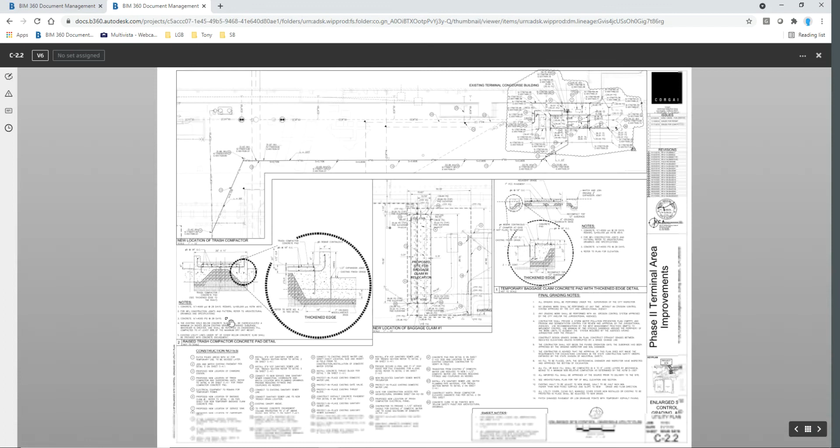So project drawings, early work. So this latest one. Okay, so you go in, you find the sheet. So let's say it's this sheet that you want. That's the right sheet. You have a few options. You can click here and you can export. And then it asks you, do you want to export with all the markups, which are all the RFIs and the hyperlinks? Usually I'd say no. Press continue.

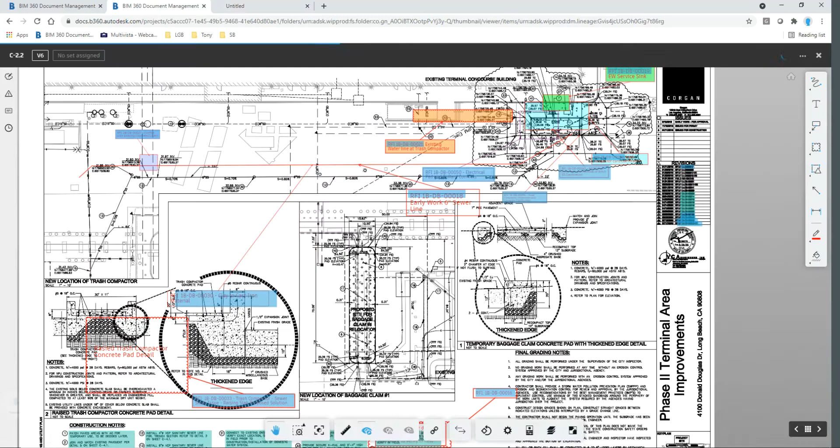This thing will pop up. It says, hey, this is a sheet. Where do you want to save it? I'll save it on my desktop for now. Boom. So now we have that one. We have the other file. So now what we're going to do is let's clean this file up first. So we're going to open up the DCN.

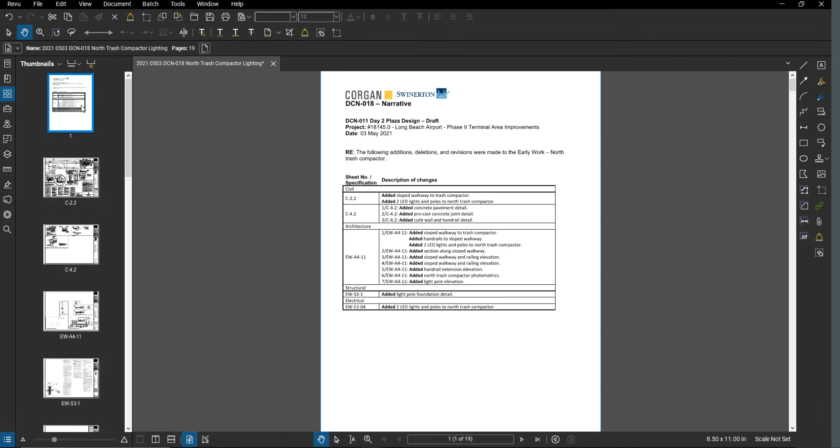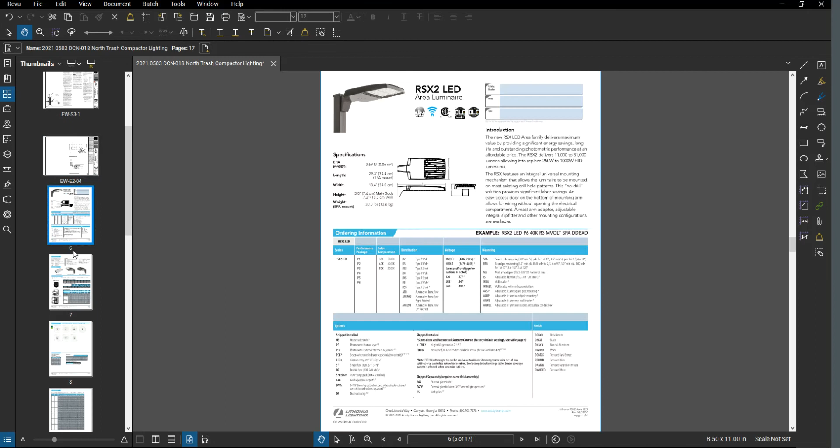I usually just start by deleting all the pages that we don't need. So I'll delete the cover sheet. We'll keep this one. I don't think we need either. This one we'll keep. We'll keep that one. This is the electrical sheet. Okay, so we're going to do one RFI right now just for the location of the light pole relocation. So right now, really, all we're going to show them is this light pole relocating. So we probably don't need the elevations.

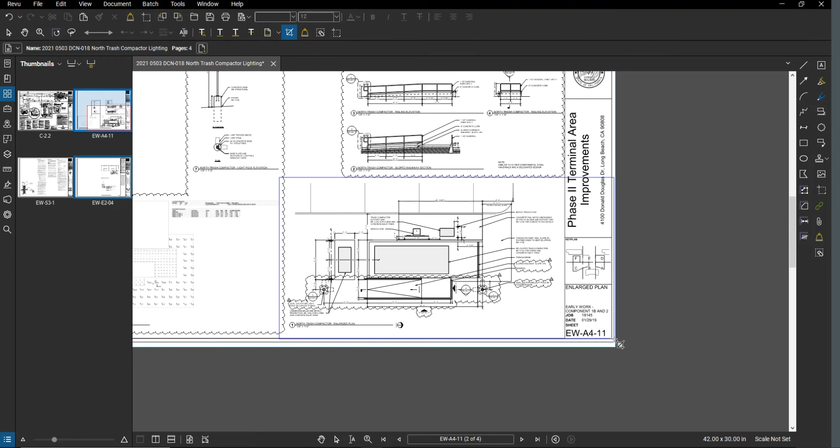So usually what I like to do is I'll crop the sheet with just the information that I need. So in this case, I'll grab the crop tool here and crop this. I'll include the page number. That way the page number is in there. Boom. So now you have just the plan view that you need, the sheet number. We're going to do the same thing with the civil. So this one's a little tricky because the sheet that we want is here for the information, but the page number is down here.

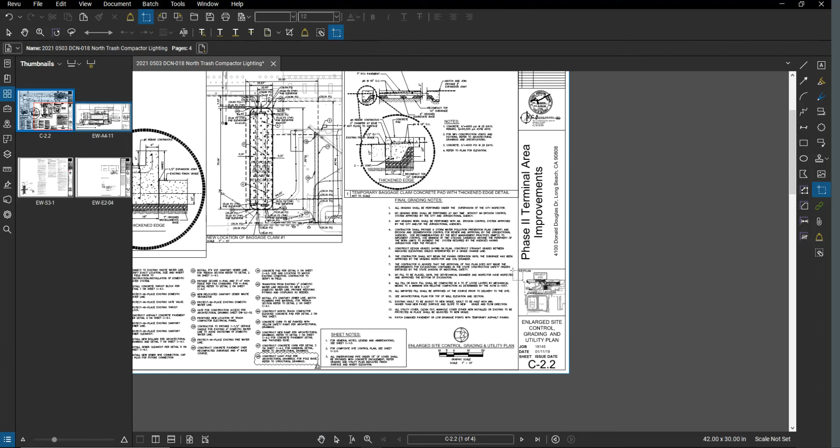So what I do is I do the snapshot. I do a snapshot around just the page number. Wait for it to load. Right click, paste. So now you have it. It looks weird. It's usually this fill color. Change it to white. Now it's solid. So I'll put it somewhere in here. I can make it smaller. Actually, let's find a corner for it. And then I'll do the same thing. I'll crop just the information that we need. So crop it to here.

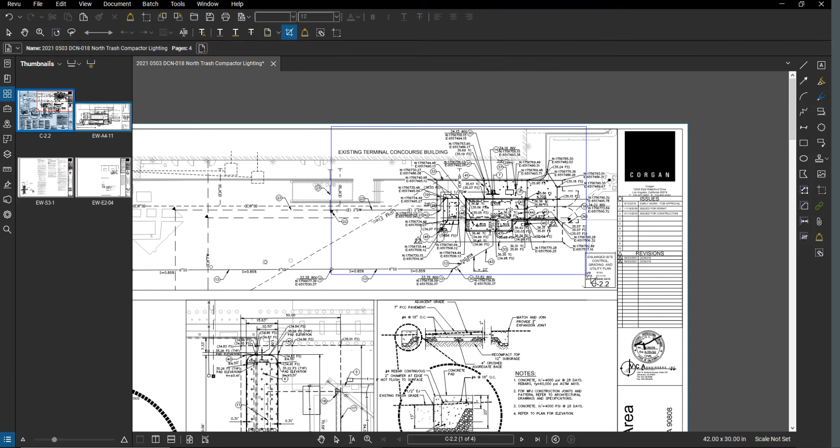All right, so now if you were to print this out on 8.5 by 11 or whatever, it'll come out fine. So you can actually see it. So now we have these two cropped sheets. We don't need this one. We don't need the electrical. Okay, so I'm gonna save this. So now we have this DCN with just the sheets already cropped. I'll select all the sheets that I need. Right click, combine. Once it combines, I'll do RFI and then press OK. It's going to create a new file.

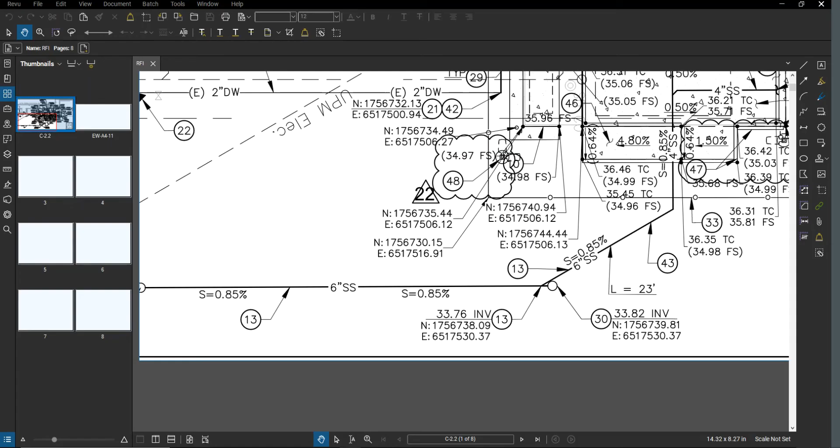All right, so we just combined all the pictures, all the plan views. So we already have our cropped sheet with the page. We got the next one. These pictures we took, but we're not going to need. That's a separate RFI, so we're going to delete these for now. And we're going to keep this one here. And really the issue is that light pole is in the way of this trench, which has a sewer line in it right now. So the first thing we'll do, I usually like marking it up. I'll use this polyline and maybe highlight where the trench is. It's roughly here. It goes here.

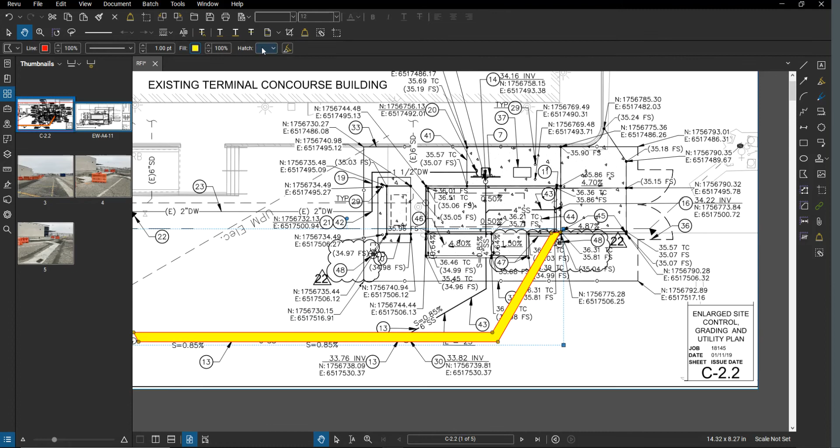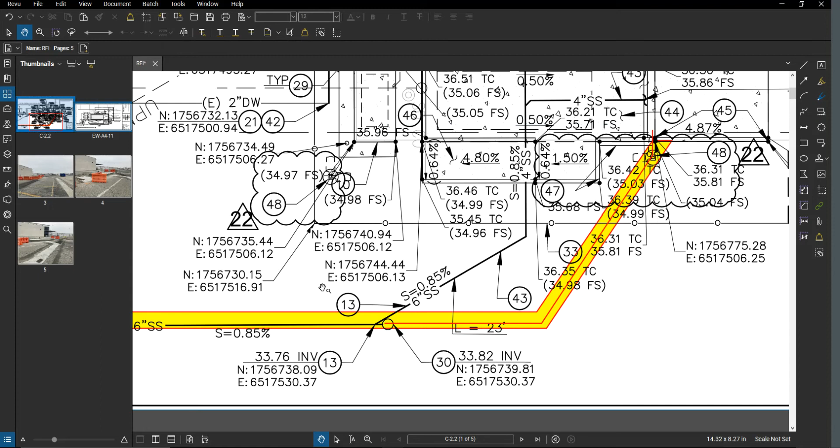And then right now it's hard to see, but I'll usually infill it with yellow, and then make sure it's highlighted, that way you can still see through. And in reality, this thing is actually probably right here where the light pole is. And then maybe I'll draw the sewer line, how it actually extends to here, here, and here. So now it's really visible. So then I'll start using just my leaders. I'll start calling them out.

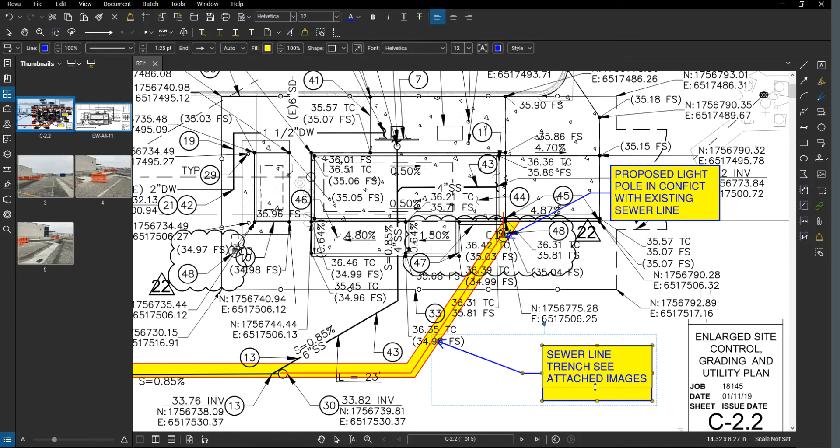So call out and say proposed light pole in conflict with existing sewer line. And then I'll do an extra call out. I'll say sewer line trench, see attached images. Okay, so now light pole in conflict with existing sewer line.

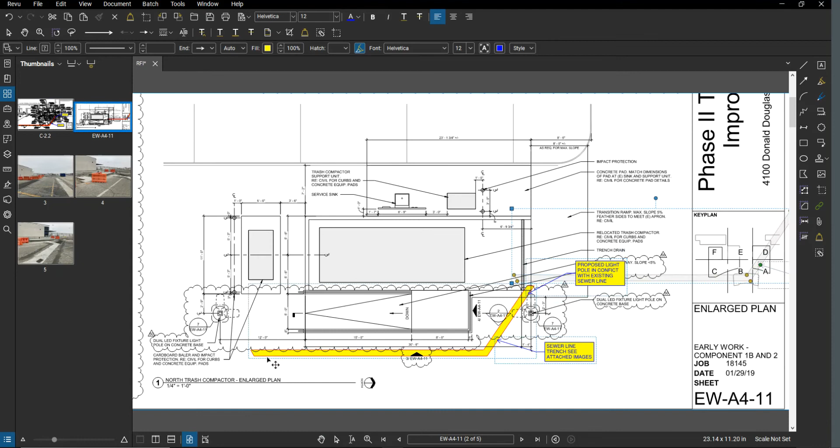What we'll do, I already have these notes marked up, so I'm gonna just copy it on this plan too. And it may not scale perfectly, but we'll see. Oh, I think I only copied one item. I don't know what I did. Copy those three things. There it is. So we'll try to bring it up here somewhere. I just didn't want to redraw them again. But that's roughly where the sewer line is. Somewhere in here. So you can see that light pole is going to be in conflict with the sewer line.

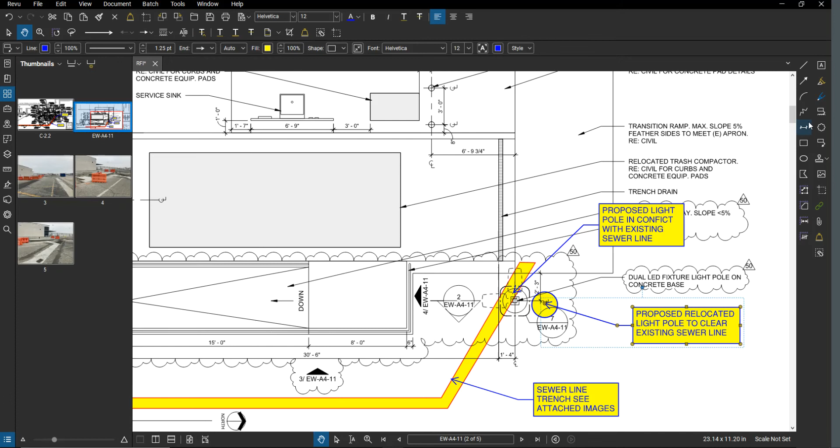So really the option is we're going to propose a new light pole location right here. And then maybe what we do, we say proposed relocated light pole to clear existing sewer line. Architect is going to want to know how far we're moving it. So we already measured it out in the field. We're going to call it 3 feet. Okay, so the text is off. We'll make it bigger. Font 48. Did I type in 3 feet? Yeah. There it is.

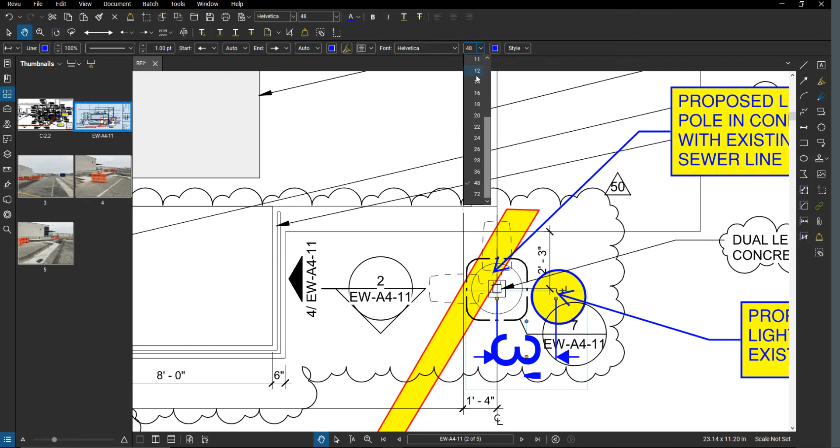3 feet. And this is more right there. Perfect. So we have it. We marked it on the civil drawing. That way they know that the sewer line is already on the civil drawing. It just got extended in here. We marked it up here. And then I'll just copy these same notes since we already typed them up.

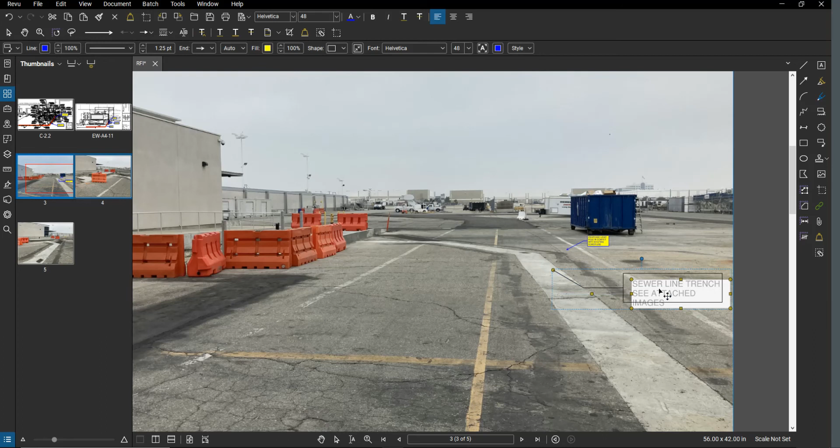So sometimes when you bring them in, they're not going to scale right. So what we're going to do is change the font. Do 48. Yep, that looks good. It's proportionate to the picture. Something like that. Okay, so that's good. Now, let's keep that picture there. We'll move both of these. Auto size. Okay.

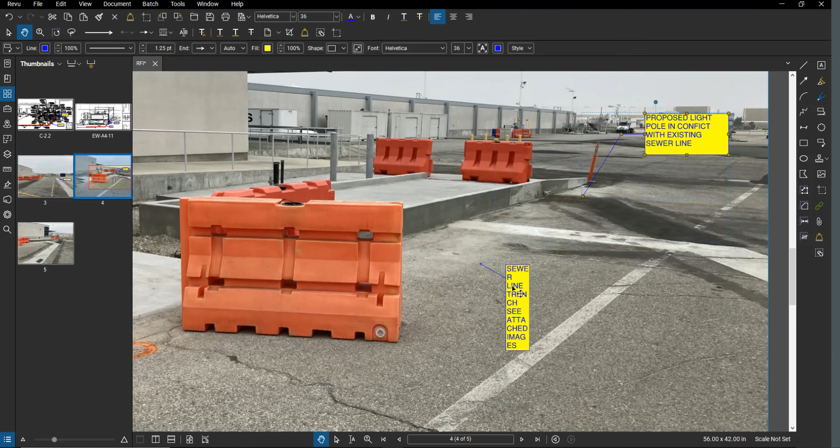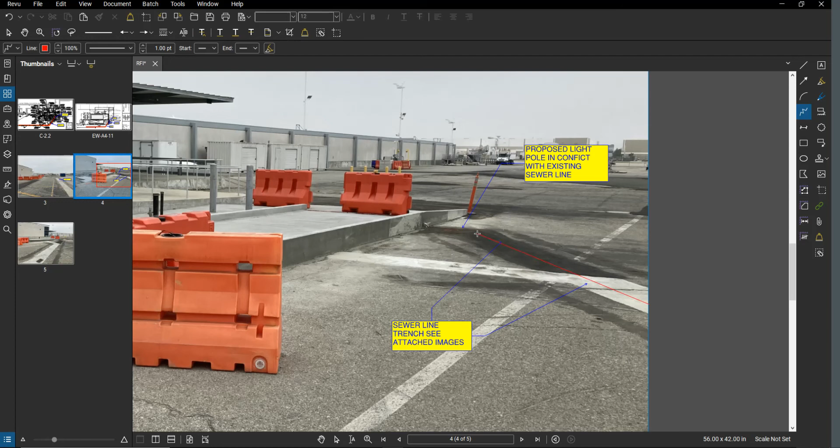Let's get it back. Okay, so we'll just kind of point the notes at the right spot and we'll kind of tweak them in right now. So here, this is where the trench is, actually an asphalt trench here. That's where the sewer line goes. Maybe to make it clear, we can even draw in the sewer line, right? Just so people can really see it, right?

Maybe make it a little darker or a little thicker. This is where the more you mess around and the clearer it looks, the better answer you're gonna get. Maybe do a dashed line, something, right? So that really pops out now. Okay, so right now we're gonna propose, and I think you can see it. You can barely see it, the light pole here.

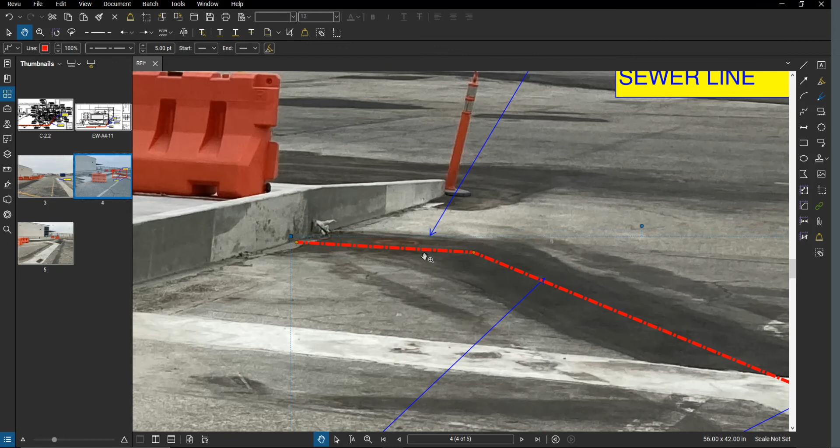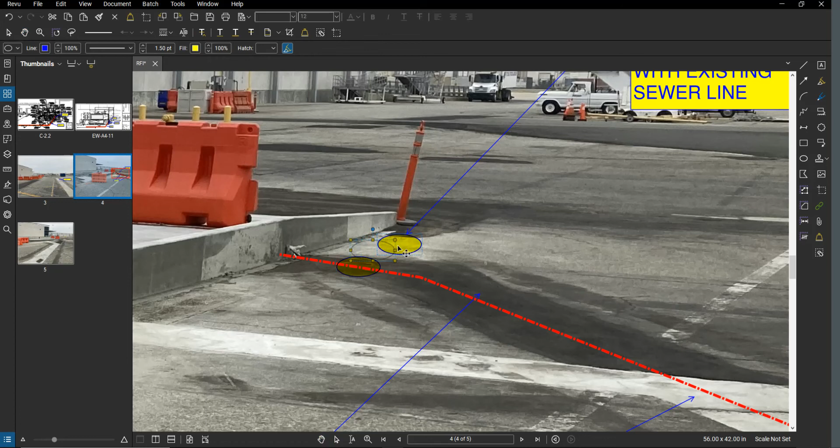That's a circle. So again, it's hard to see, but what I'm gonna do, I'm gonna cheat it, and I'll draw it in, and I'll say, that's where you want it. That's where the existing one is. That's where the proposed light one is, and this is where we're going to move it to right here just to clear that one. So this is the proposed light pole in conflict with the existing line, and maybe I'll put an arrow showing that we're going to shift it.

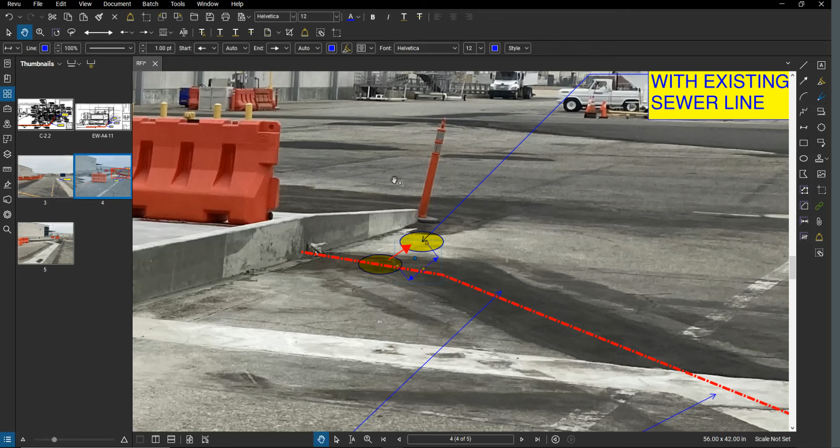It's kind of hard to see the arrow, but we make it thicker. A little too thick. There it is. And then just for extra confirmation, we'll add the same dimension, 3 feet. Again, hard to see. Make it a little bit bigger. So you always got to be tweaking the font sizes, line weight. So right now you can see the 3 is kind of hard to see. So maybe make it a little bit bigger. Maybe make it bold. All right, so you can try to mess around so it's a little clearer now.

So I think this picture is probably the same. We could mark it up again, but we'll keep it simple. I think that's all we need. So we have a plan, both the civil and the architectural. We got a couple images. I think it's pretty clear now. So now the only thing is we got to package it up and type it up as an RFI. So we'll do it on an email for now.

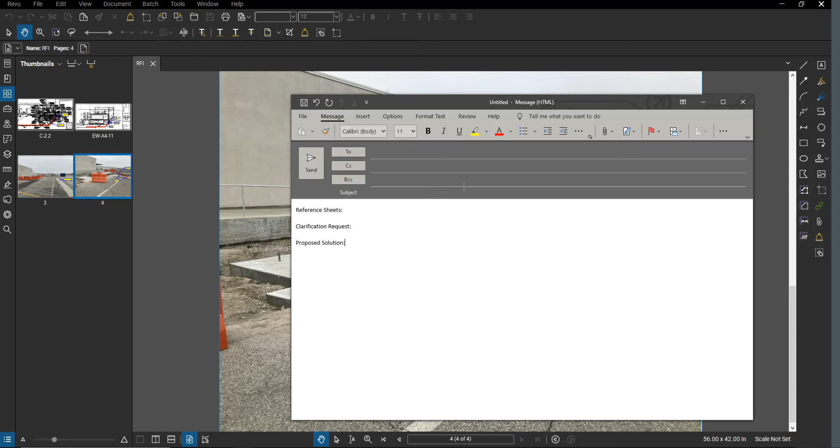Okay, so we're going to start a new email. Usually what I like to do is all the RFIs, I set them up the same way. I start with reference sheets, and then clarification request, and then proposed solution. So if you start off every RFI with these 3 things, chances are you're going to have a pretty good RFI. All right, so what I'll do, I'll make this a little bit small.

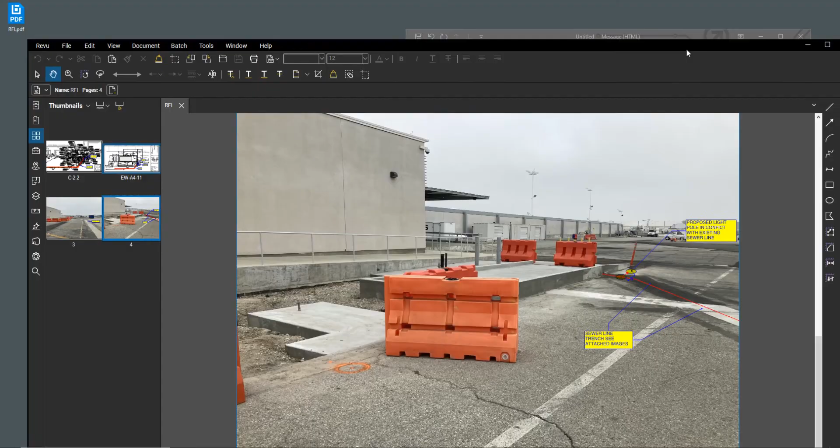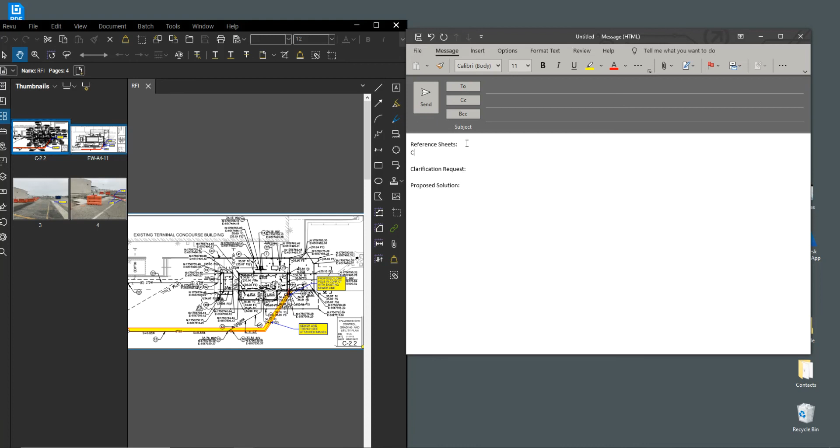That way we can have the sheets and the email side by side so we can kind of reference it. So we got that. Okay, so reference sheets. I got C2.2. I got the next sheet, EW, A4-11. And really the goal here is you're trying to put every single sheet, every single elevation, section, detail, whatever it is, so that the architect has everything in here. He doesn't have to go and search for his own drawings.

As soon as he opens up the file, he's like, you know what, I can answer it with just these sheets and the pictures. So I reference the sheets. Also, this will help when it comes time to posting the RFIs. You already know which sheets you have to post the information on. So clarification request, we usually start with sheet, and here I'll just copy these 2.

Call out for new light pole adjacent to Bailer Pad. And then really the problem is there is an existing 6-inch sewer line which will be in conflict with proposed pole location, and I'll put see attached marked up drawings and images.

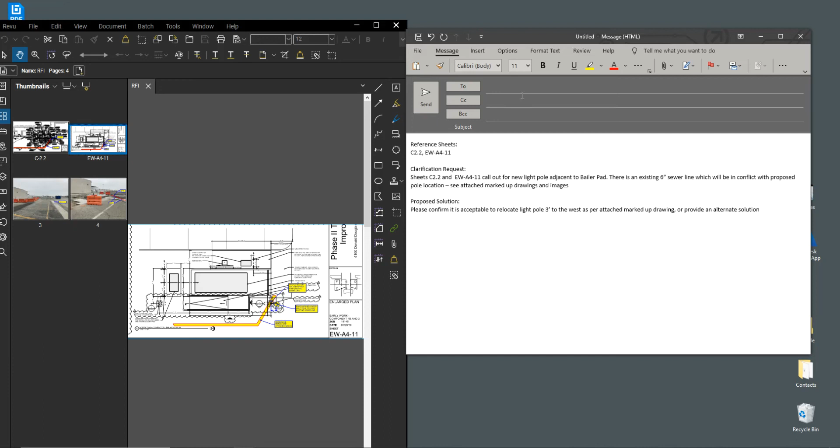I mean, if you stick to these 3 sections for every RFI and you try to propose at least one solution, and obviously leave it open to them if they want to propose something else, the architect kind of has everything, and most of the time you're going to get the answer that you're looking for. Right? So then save the file, put it here, and send the email to the project engineer, whoever's going to process the RFI. And that's it.